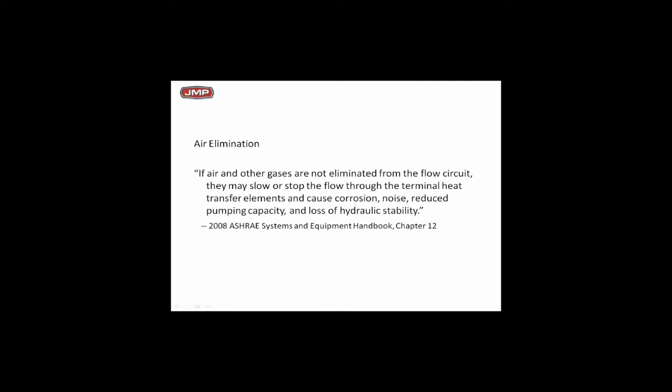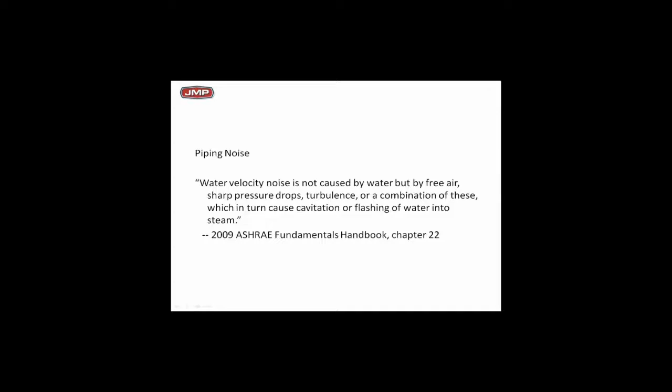Will air in the system cause problems? ASHRAE says yes. If you get air in the system, you're going to get noise, you're going to lose stability of the system, you're going to lose heating and cooling ability. Noise comes from high velocity. You got air entrained, it's going to be noisy, and you can hear those little bubbles being pumped around the system per ASHRAE. So we definitely want to control the air and try to get it out of the system if we can to avoid problems.

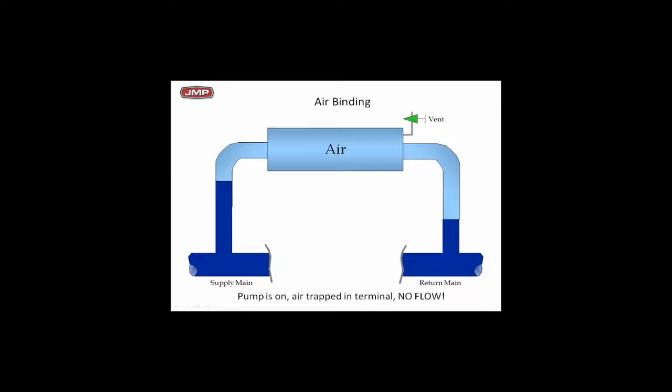Notice this particular situation, I've got a heating coil or cooling coil that's air bound. And the pump's on. How do I know? Because the supply main water column is higher than the return main water column. See the difference in the two? So we know the pump's on, but there's air up there, and it's trapped. So we have no flow through the heating coil and or the cooling coil here. No flow means no heat. No flow means no cooling. That's bad, all because of air.

So let's look at the point of no pressure change and what happens if we get air in the closed system. Real quick at this slide, you've seen it before. We got an expansion tank, we got 12 pounds pumping away from the expansion tank, we got great system pressure control. But look over to the right. What would happen if these little round football-shaped things are air bubbles out in the system?

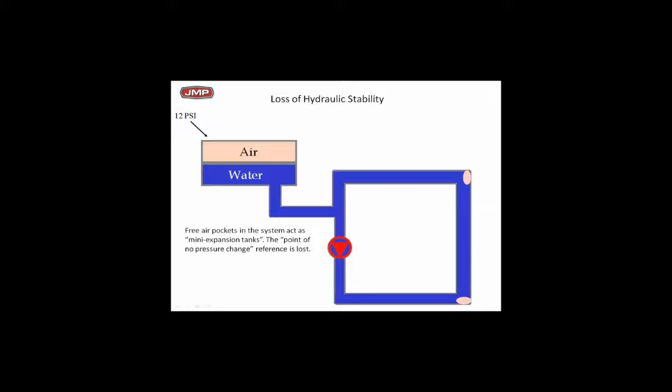They're air-bound coils out in the system, just like the one I showed you in the previous slide. How does the pump know which one is the boss? How does it know where the point of no pressure change is? We don't know what's going to happen. You start getting air out of the heating coils, the cooling coils, they might behave like an expansion tank. The pump's stupid. It doesn't know where you intended for the point of no pressure change to be. It's back at the expansion tank, but it doesn't know that if you put air bubbles out in your system. That's really a bad thing to have happen.

Here's a primary, secondary, variable volume system with a variable speed drive on it, a chill water system, great system. We put it in to be very efficient, lower that pump speed down, save all that energy, and we let air pockets get into the cooling coils. Look at that center cooling coil. It's got an air pocket at the top of it, okay? We got a two-way valve on it.

What does that mean? Stop and think a little bit. An air pocket is going to cost you money by your pump running faster. Wow, an air pocket's going to cost you money by your pump running faster. Absolutely. You got air in that cooling coil, in that center coil. That means if you got air in a water cooling coil, it's not going to work too well. The heat transfer is not there. So nobody's happy because you're not getting cold air off the coil. You got flow through the coil on the bottom, but the whole top of your coil is full of air.

So what happens? The thermostat in the room on the wall says, I'm not happy, and tells the two-way valve to do what? Open, wide open. Now you got a two-way valve wide open on that center cooling coil trying to put more water through it, but the air in the cooling coil doesn't let it work properly. Now you've got more flow, so your pump's got to run faster to give you more flow, even though you're not getting any cooling out of it, and you wind up with an energy hog.

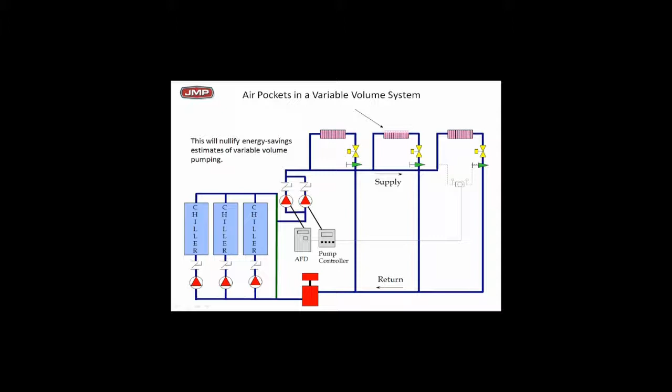So getting air out of a system is critical to making sure you've got an efficiently running system. It's very hard for some people to see this connection, and I hope you understand with this slide how important it is to get air out of those coils and get it back where it belongs, to make your systems run at the minimum energy levels we can get them to run.

So how about air in solution? What do we know about air? The hotter the water, the less air it can hold. You know what a deaerator does for a living? Basically, you heat the water up to drive air off. So if you cool water down, you suck air in. The hotter the water, the less air it can hold, the cooler the water, the more air it can hold. You kind of got to understand these basic things that you already know.

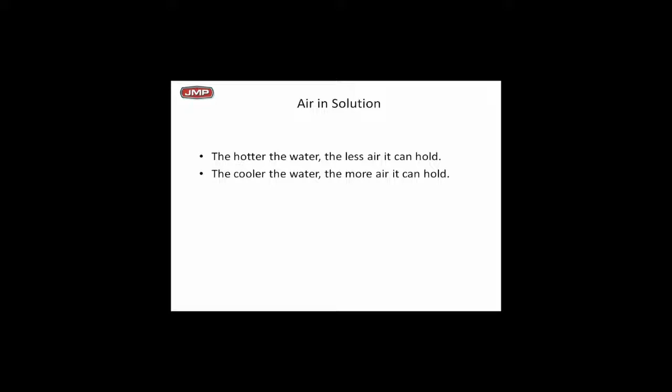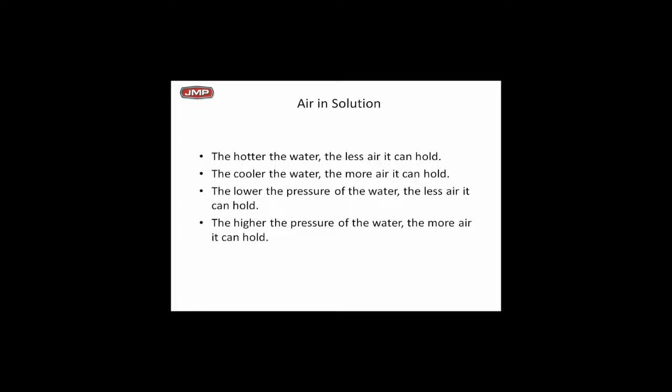The lower the pressure of the water, the less air it can hold. The more pressure we put on water, the more air you can drive into it. So these are fundamental things about air you already know.

If you take a glass of water out of the faucet that's been under pressure, and let it sit on your desk and warm up, you would normally see little bubbles forming around the water coming up to the top because you've taken the pressure off. When you take pressure off, the water had a bunch of air in it under pressure. You take the pressure off, air starts popping out.

So these are the rules we want to understand. You're taking pressure off of the water. Is that cold water? That water is 60 to 70 degrees, sits on your table, it warms up. So you're warming the water up, driving air off, and you're taking the pressure off, driving the air off. So what does that mean to you?

The lower the pressure and warmer the water, the more air you get out of solution. So I wonder where the best place would be for an air separator. Well, wait a minute - you're telling me hot water and low pressure. You got it. That would be where you want your air separators to be. So the lowest pressure possible with the hottest water.

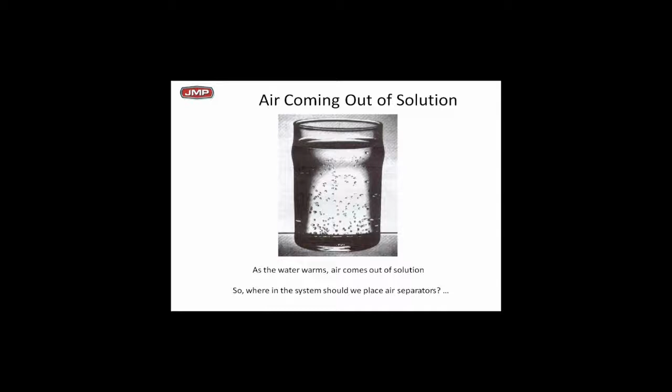So in a chill water system, we would normally put it with the return chill water. Return chill water would be 55, 56 degrees, which is probably the hottest point in the system. That's where we want the air separator. We also would want it on the suction side of the pump.

And most times, in this particular situation, primary secondary, you've got that little green bridge in there, but we're on the suction side of the distribution pump, which is normally the high head pump. So the ideal location on a primary secondary system for the air separator would be, as shown here, hottest water, suction side of the primary pump.

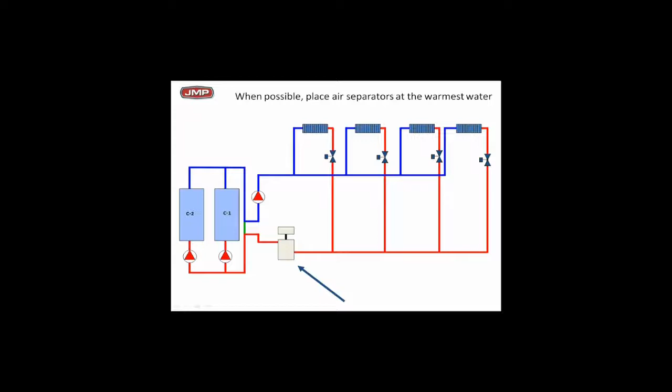When possible, place the air separator in the warmest water. In this case, we've got a boiler. Where's the hottest water? Obviously, the hottest water is coming off the boiler, so we would prefer to pump away from the boiler, away from the air separator, away from the expansion tank. That gives me the lowest pressure and the hottest water, and I got my best shot to get the air out of it on startup. That's very critical.

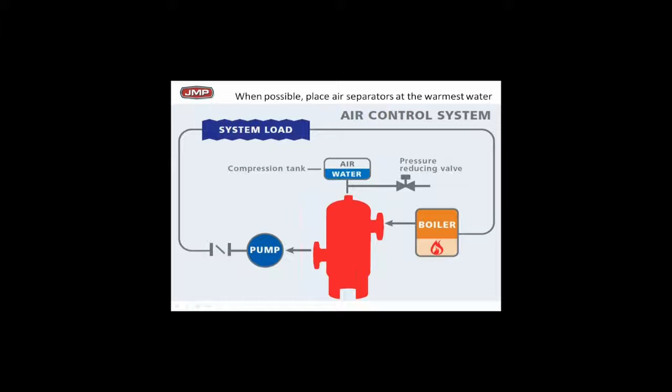You understand that. So when you have a system under pressure, when you pop the top, what happens? You lose pressure, air comes out, and you now have an open system. I think this, going back to this old Coke can, is a great way to illustrate to you the difference in an open and closed system.

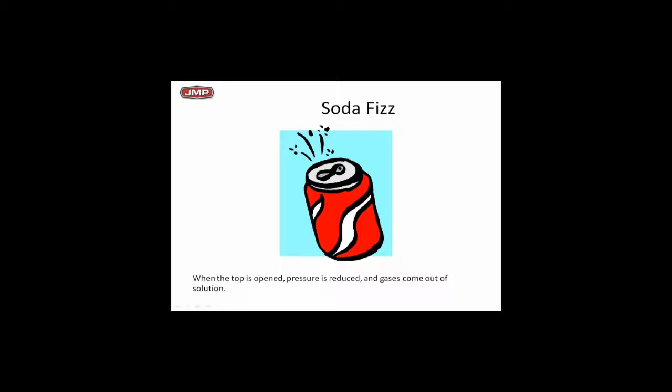And what is our goal? Our goal is to always keep that closed system. We don't want an open system. So let's keep this in mind a little bit and have a little fun and understand some of this.

And related to this would be system pressurization. When you take pressure off of water, air pops out. When you heat it up, air pops out. Now, what in the world could this have to do with the Thames River Tunnel?

The Thames River in London is where the first large tunnel was made under the ground. In 1843, they tunneled down underneath the Thames River, and at this time London was probably one of the most active seaports in the entire world - the British Empire was probably controlling the world. They put a tunnel underneath the river. You could walk through it, as you can see in pictures here, and trains could go through it under the river. When it was completed, they considered it the eighth wonder of the world.

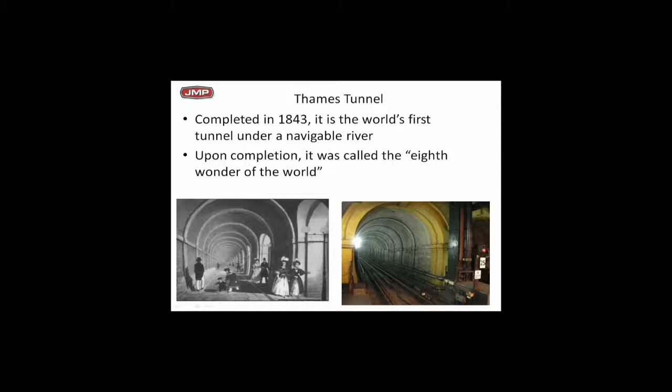Now, it was 75 feet below the water level of the river, the lowest water level of the river. This tunnel was 75 feet down below that, so the ships could pass back and forth above. Keep that in mind with system pressurization.

This is a little fun. So when they finished up the tunnel, all of London was so excited about what they were calling the eighth wonder of the world, 1843. They put a big party in the tunnel, and they had champagne, and they had a great big party down there.

They were 75 feet below the water of the river. The river's above this tunnel - they're in the tunnel down below the river. Atmospheric pressure is up, not a whole lot, but a fair amount. You're down below enough that the pressure is higher. They all were drinking champagne, all having a great time.

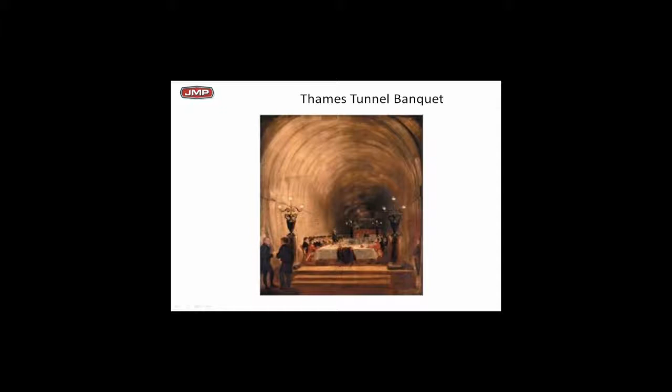And when they walked out of the tunnel, came up to the surface and rose up 100 feet or so in the air to get back on street level, guess what happened? Very simple - they all got intoxicated because the bubbles started coming back out. The champagne was full of bubbles. When it came to the surface of the streets of London, all those gas bubbles started coming out, and people got sick. They thought they had a problem. This is one of the first examples of understanding what happens with pressure on gas - pressure driving air into solution, taking pressure off, air pops out. Kind of a trivial tidbit, but an interesting comment.

So there are lots of air bubbles in water that you can control by pressure. Another example: milky water under pressure. When you take it out of a faucet and put it in a glass, it looks milky because it's got so much air coming out of solution, since you took the pressure off.

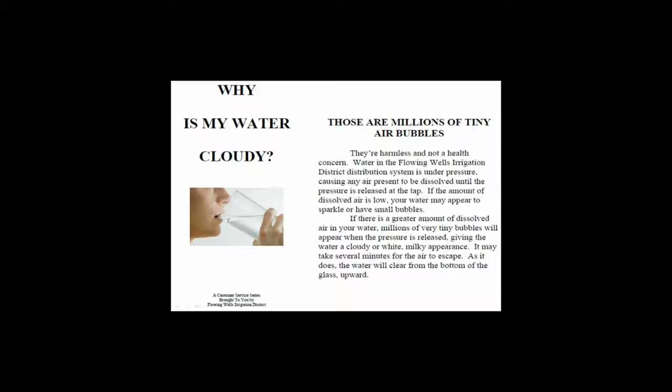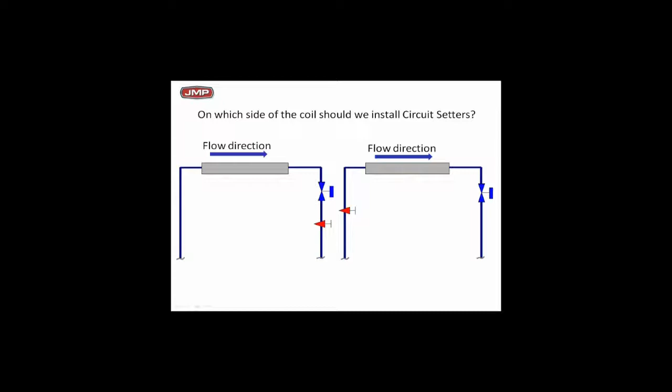So what can we do with this? We've learned about adding pressure to drive air in and taking pressure off to take air out. Which side of a cooling coil or heating coil would you put a circuit setter? I'll show two different possibilities. I've got my circuit setter on the left-hand side on the outlet, and on the right-hand side it's on the inlet. Remember, the worst place in the world to get air would be in the cooling coil - you don't want air in that coil. So by putting it on the supply side, let's take a quick look.

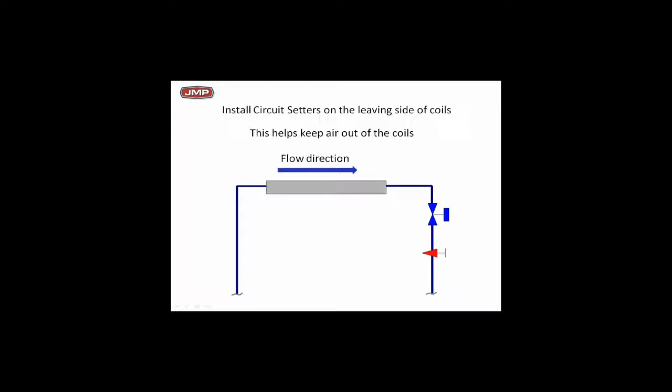If we leave the circuit setter on the outlet side, it keeps air out of the coil, because air removal from the system is very simple. I want a circuit setter on the outlet side to keep the pressure in my cooling coil as high as possible, to drive as much air in as I can. Therefore, all the ASHRAE drawings I've seen show the balancing valves on the outlet side of the coils, not on the inlet side. If they're on the inlet side, we're reducing the pressure by the pressure drop through the balancing device, which lowers the pressure in the coil, meaning air is going to pop out in the coil. If we put it on the outlet side, we keep the pressure higher in the coil, drive air into solution there, and make it work much better. That's why balancing devices belong on the outlet side of a coil, not the inlet side. Air removal from systems - there's a couple of little tidbits worth looking at here.

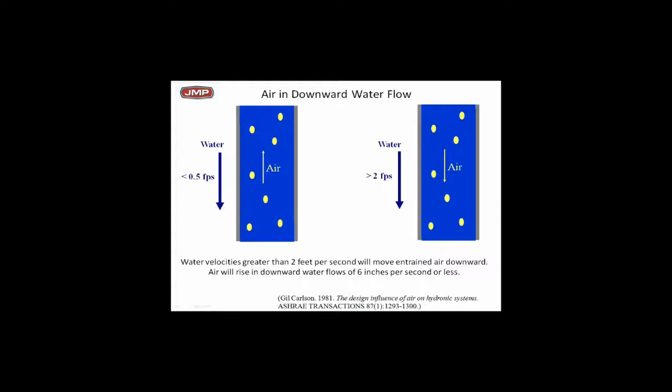If you go back to ASHRAE and Gil Carlson, 1981, this is a trivial little thing but worth looking at. If you can keep velocity above 2 feet per second, you can entrain air and take it down a vertical piece of pipe with you. If you get the velocity below half a foot per second in a piece of pipe or anywhere else, the entrained air is just going to pop out. So if you're building an air separator, that's all you've got going - you want to keep it below half a foot per second. If you've got a coil above you and you're trying to bring air down, you want to size your pipe above 2 feet per second to bring the air down with you.

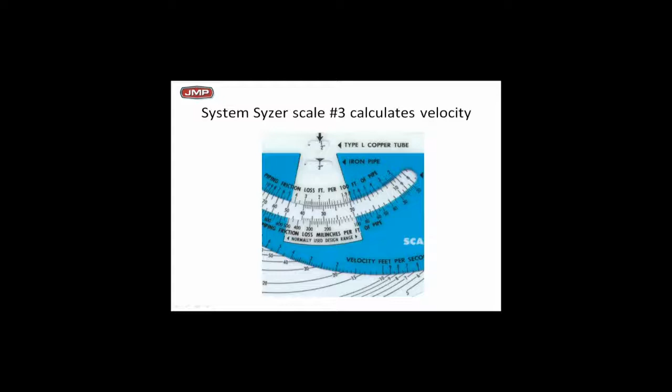So let's take a quick look at a System Syzer based on pipe size - scale 3 gives you that velocity. When you start looking at some of these, you need to be aware of those velocities if you're worried about moving air around in a system.

Let's go back to the air-bound system we had earlier. Here again, the pump's off, and you see that we've got air trapped in a coil. Now, we said if we could size that pipe on 2 feet per second, we could take that air and bring it down. But the next thing is we've got to make sure we get flow through the coil to entrain the air and bring it down at 2 feet per second. So the pump is off, air is trapped in a terminal. The water coil is 3 feet above the pipe, and we've got about 1.5 feet of air and 1.5 feet of water.

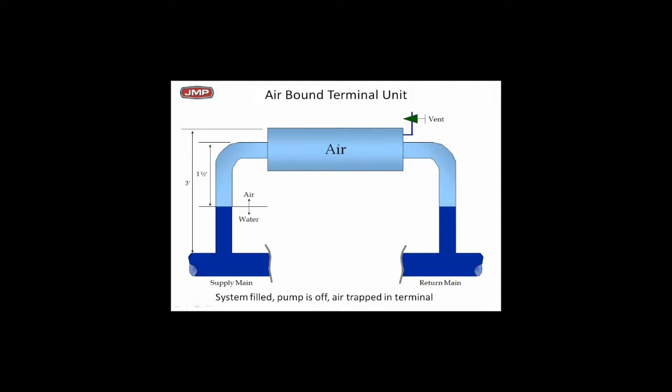When we turn the pump on, the pump raises the water on A, lowers the water on B, but we don't have enough pump pressure to force water through the cooling coil. So what do we have to do? If we added a circuit setter on the return side and made sure the pressure drop of the circuit setter was higher than the elevation of the coil above the main supply main, then we could force some circulation.

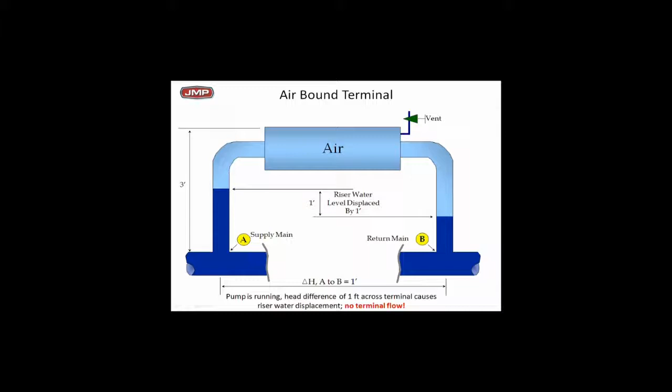That's all we've done. We put a circuit setter on that piece of pipe with a 5-foot drop. That means I've got to have more pump head now to make it flow, yes. But that extra pump head would allow me to get the water that much higher to the coil, and I can purge the air out of the cooling coil.

Now, if I size my downcomers on 2 feet per second, I've got a way to actually vent a coil at a high point by making sure the pressure drop through my circuit setter on the return side is higher than the elevation of my coil above my main pipe, above my supply main. That's critical, making sure you've got more pressure drop through the circuit setter than the elevation.

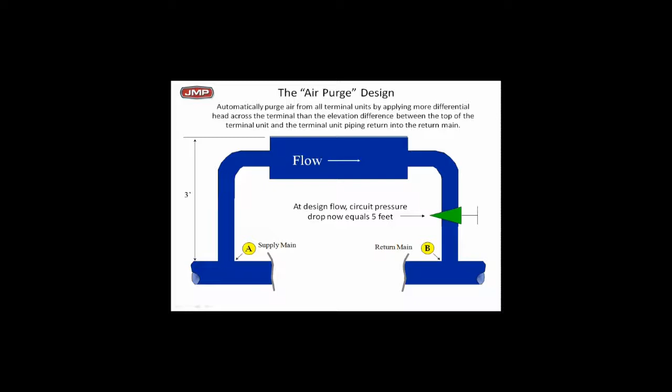And we make sure we size it on 2 feet per second. We can actually take the air out of the coil. We can purge it right out. Nice little trick for some of you senior engineers listening to this—you may never have heard of this. It works, it works like a charm. You just got to spend a little bit of time sizing your pipe properly. And you may have to actually put a circuit setter in there and add a little extra pressure drop to make sure you get the water up that high. Cute little idea, I really think it makes some sense.

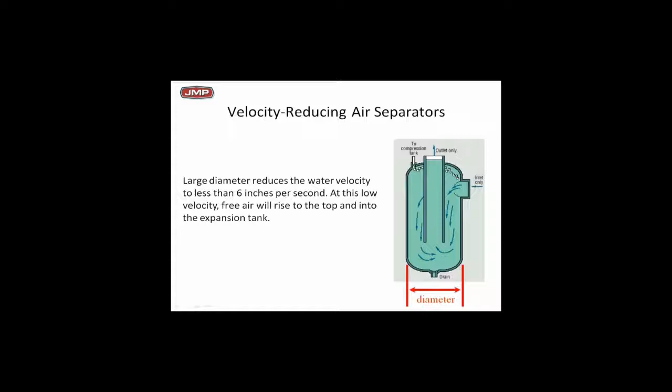So if we start looking at velocity reduction air separators, the inline air separators, we've got to be down to 6 inches per second to make sure the air comes out. We've got to slow the water down. If we go to a Rolairtrol type of device, we have tangential flow. So now we've got centrifugal force—air being lighter than water, air comes to the middle, water on the outside where the biggest force is—we're bringing the air right out of it.

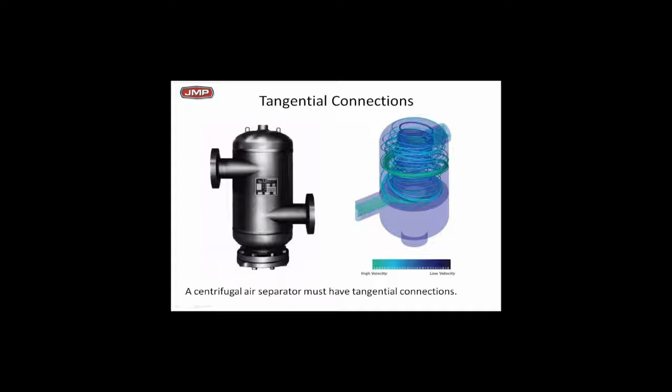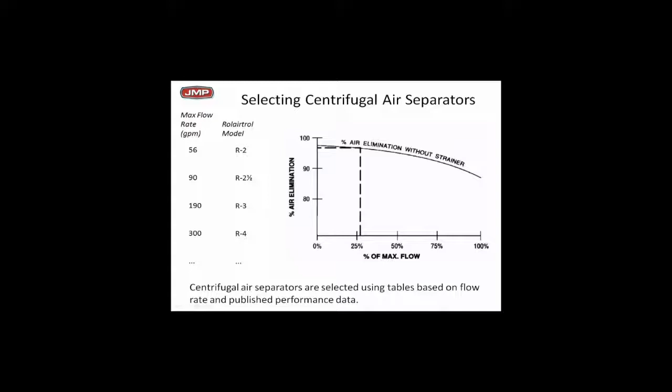So when you specify air separators, make sure you're looking for tangential connections. They really make a huge difference—tangential connections where you get centrifugal force working for you. Here's some charts on the efficiency. With tangential connections, we can control the efficiency and get up to 90% of the air out on the first pass. Of the entrained air, we can get over 90% of it out on one pass when we size them properly.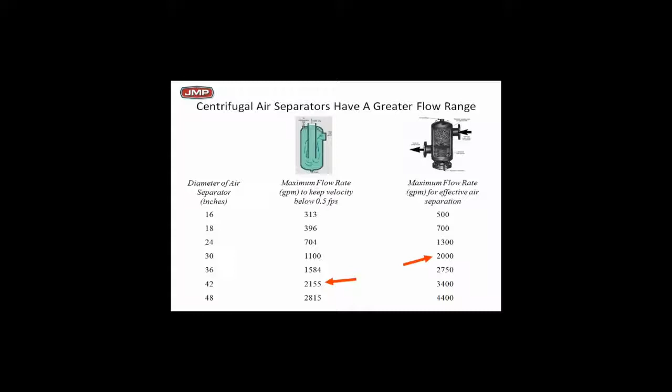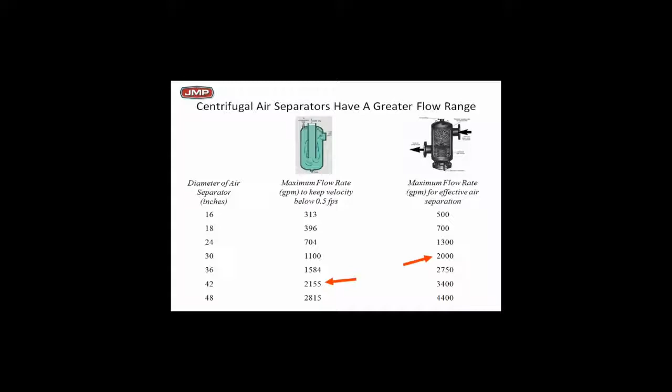This example shows you a 30-inch tank being a Rolairtrol. This is 2,000 gallons per minute, where if you look at a 42-inch tank required for the inline type. It's hugely critical, a real simple thing to add to your spec, making sure all your air separators come with tangential connections. Just that simple. It's not a very hard thing.

And you might call this a boiler's best friend. We're seeing more and more buffer tanks. Now, by nature, buffer tanks have a huge amount of water, and guess what? Very low velocity. So they really do make a great place as an air separator because we've got the water down below 6 inches per second. You can put an automatic air vent, a 107A air vent, on top of these things, and they do a nice job of separating air.

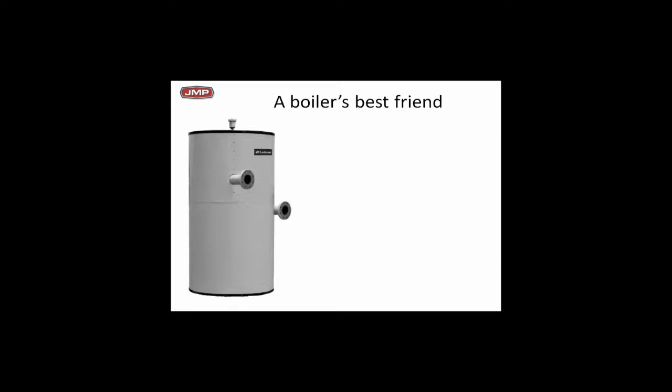And then not the expansion tank—you still got to have that bladder tank or an expansion tank somewhere, but they can take care of the air separation bit. And if you've got a huge buffer tank, chill water or hot water, and you're slowing the water down below 6 inches, or 0.5 foot per second, they work really well as an air separator.

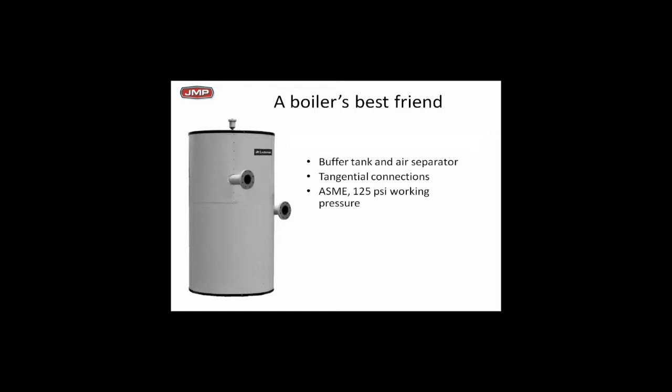So here's a typical Lochinvar buffer tank. You can even have tangential connections on them if you wanted to make it get more efficient. This is not an expansion tank.